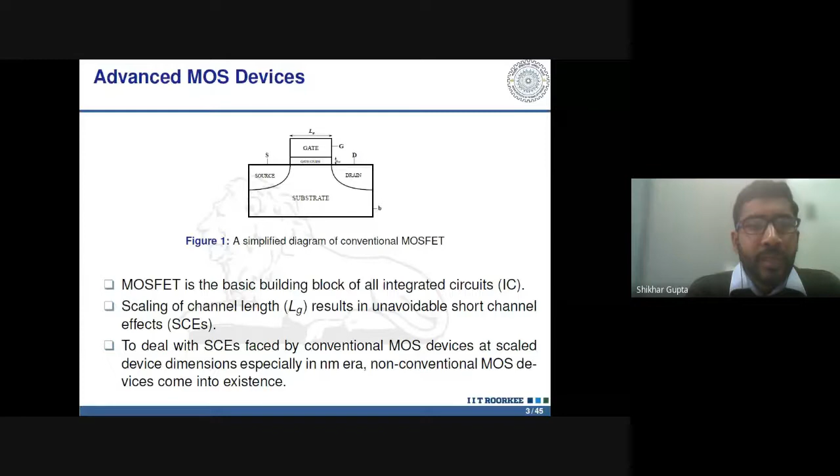To mitigate these effects, we have introduced multi-gate, multi-dimension MOS devices, which are basically under the category of the advanced MOS devices. So basically we have SOI devices, then we progress to the double gate devices, then to double gate FinFET devices, tri-gate FinFET devices, and gate all-around nanowire devices.

So there is a need to mitigate the parasitic capacitance in multi-gate devices. Since advanced MOS devices like DG MOSFET, FinFET have very good electrostatic integrity, but they also have high series parasitic resistance from the source drain region. To minimize these effects, source drain extension doping profile has been introduced with an optimized value of the underlap length.

Also, in multi-gate devices, we have seen that there are parasitic capacitances which dominate the overall capacitance of the devices. These parasitics are totally undesirable and can be neglected using various techniques. One of these techniques is introducing the source drain underlap. To overcome this problem, gate underlap is introduced for reducing the parasitic capacitance, as I discussed.

As we optimize the underlap length, we significantly reduce the fringe capacitance, resulting in enhanced device performance for low power dissipation. Optimized value of the underlap length enhances the on current, drive current, and counters the series resistance effect, short channel effect, and gate fringe induced barrier lowering effect.

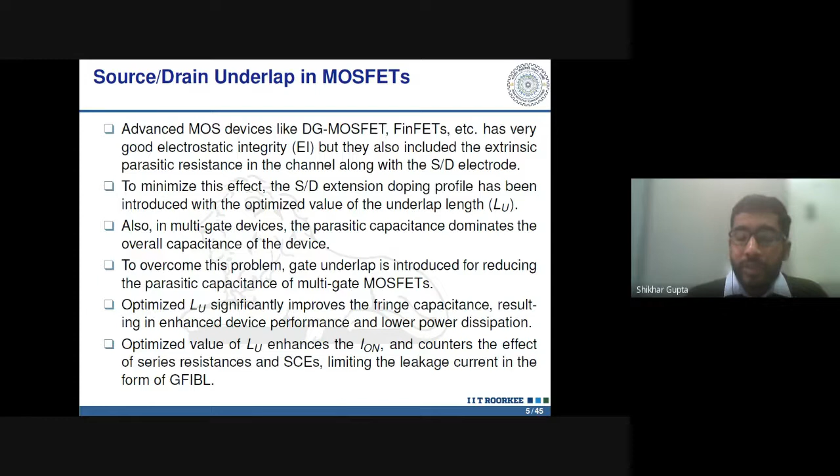These devices enhance the circuit distortion and the dynamic power of the device when compared with the conventional. Underlap devices show significant improvement on short channel effect, self-heating effect, and reduce the parasitic capacitance and series resistances, which enhance low power performance for low power circuit applications when compared to conventional MOS family devices.

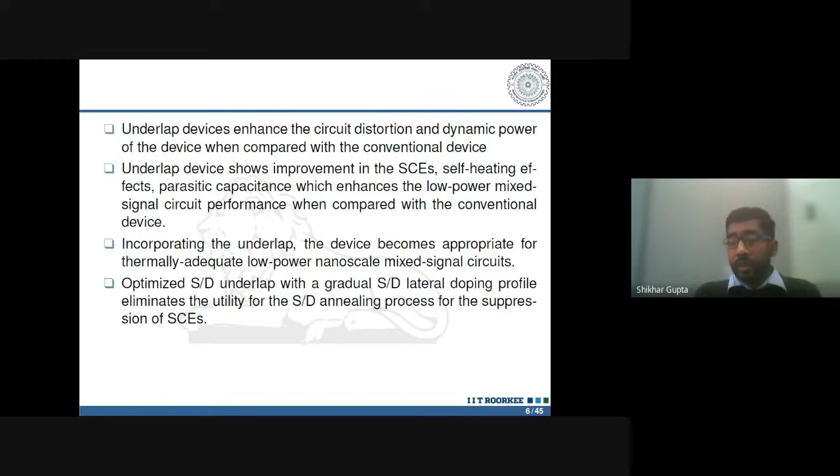The fringe capacitance in the underlap devices: parasitic capacitance, as we already discussed, is the major factor for the performance of advanced MOS family devices. One of the major parasitic capacitances is the overlap capacitance, outer fringe capacitance, and inner fringe capacitance. But as we introduce the underlap in the MOS family, the overlap capacitance is totally diminished. So the major factors dominating in this parasitic capacitance are the outer fringe capacitance and inner fringe capacitance.

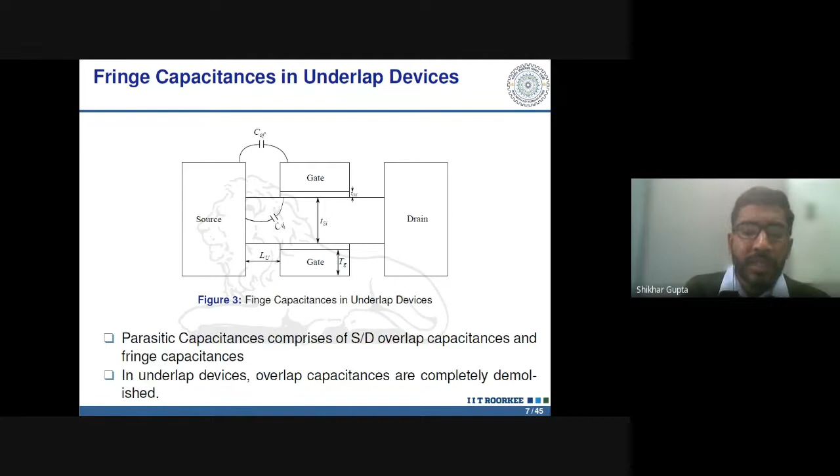These fringe capacitances are dominant and can be reduced using various spacer dielectrics, and they can also be tuned along with the optimized underlap, without mitigating the drive current capability of the device.

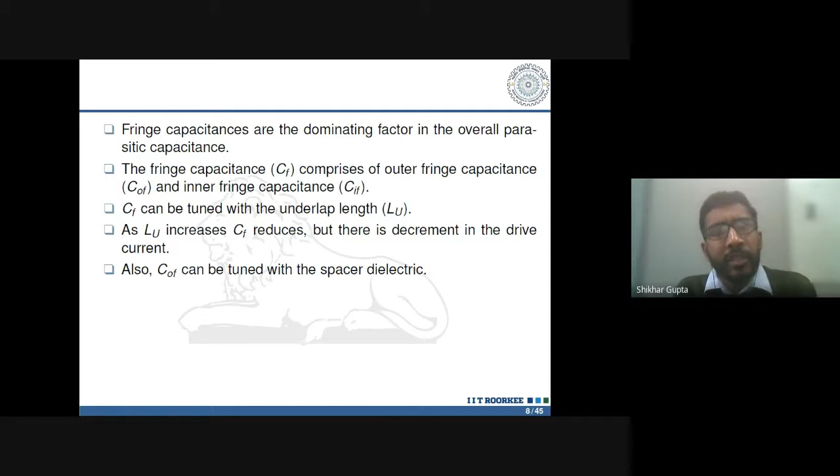The use of high-K spacer in the underlap double-gate MOSFET device enhances the figure of merit of the device in terms of gain and gain bandwidth product. It also enhances the gate fringe induced barrier lowering strength and ultimately improves the drive current, leading to enhanced device and circuit performance. The high-K spacer dielectric also enhances the barrier height, which reduces the off current, suppresses the short channel effect in terms of subthreshold slope and drain induced barrier lowering.

Some researchers introduce the dual-K spacer, which is an alternative in the spacer region for a high-K gate dielectric device, to further limit the short channel effect and reduce the output conductance of the device. It improves the analog performance of the device and is used for low power circuit applications.

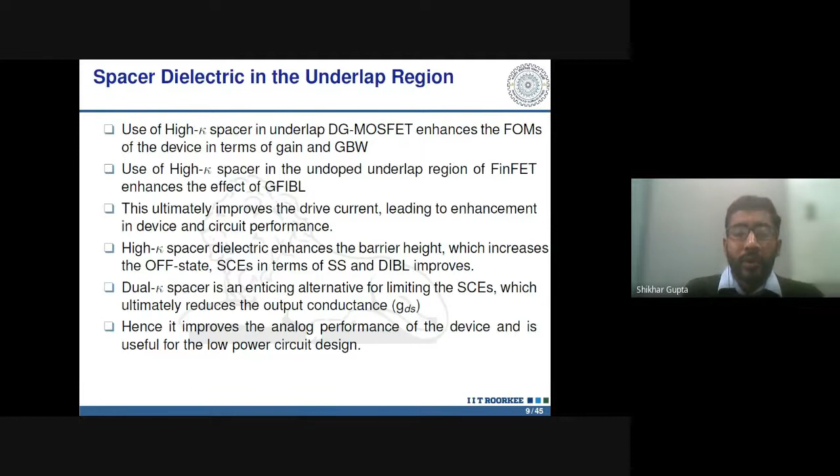Symmetric dual-K spacer means that both sides of the source and drain have equal underlap length, and the dual-K spacer has the outer-K as a low-K spacer and the inner-K gate dielectric spacer as a high-K gate spacer dielectric.

The symmetric dual-K spacer dielectric enhances the electrostatic integrity over the channel region in both on and off states, which ultimately improves the device and circuit performance. Enhanced noise margin and circuit delay can also be achieved using dual-K spacer based logic circuits, making it preferable over conventional high-K spacer materials.

In tri-gate FinFET devices, source side dual-K spacer has good gate control on the channel charge carrier, which ultimately affects the transconductance and output conductance of the device, leading to enhancement of the analog and RF figures of merit in terms of intrinsic gain, unity cutoff frequency, unity power gain frequency, and gain sensitivity.

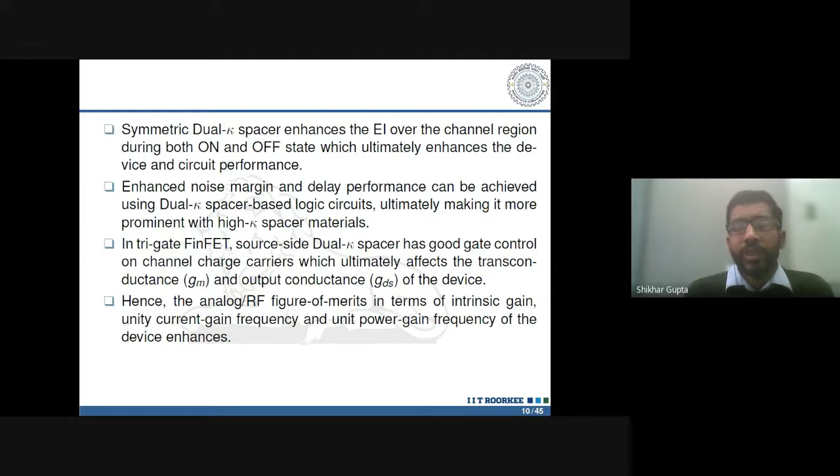For a constant current level, the dual spacer in junctionless transistors enhances the performance of the device in terms of DIBL, subthreshold slope, and on current, when compared with the conventional junctionless transistor. These methods have been reported by many researchers in various peer-reviewed journals.

So, if we reduce the dielectric constant in the underlap region, we mitigate the parasitic capacitance in terms of the outer fringe capacitance.

Conventionally, the least dielectric is silicon dioxide, which has a relative dielectric constant of 3.9. But if we use vacuum or air as a spacer dielectric in the underlap region, this reduction in parasitic capacitance also occurs.

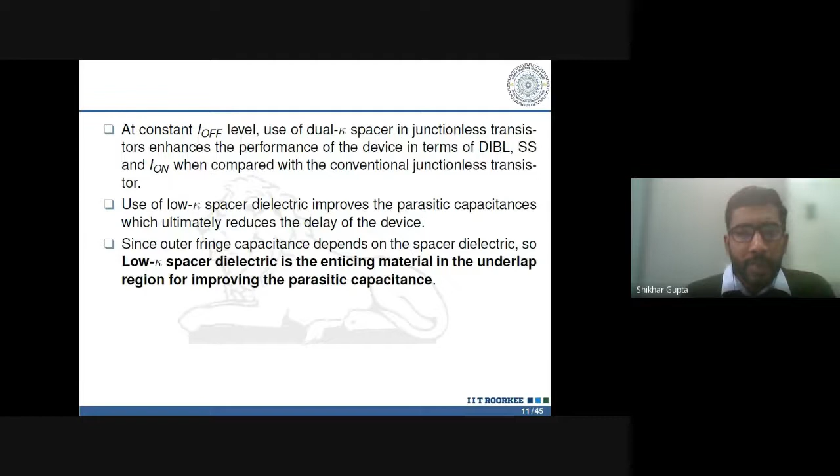This leads to the result of improving the air spacer technology. The use of the low-K spacer underlap region reduces the fringing fields of the device, resulting in improvement in the fringe capacitance. This reduces the short channel effects and power consumption, ultimately enhancing speed, switching charges, switching energy, and reducing power dissipation.

Hence, as we know, the use of low-K spacer reduces the parasitic capacitance, leading to the reduction in overall device capacitance. Hence, the delay of the device is improved.

Gate side air gap structure in MOSFET device reduces the fringe capacitance, which results in low power dissipation and high speed of operation, using air spacer instead of the conventional silicon dioxide and silicon nitride spacer. Electrostatic integrity and the performance of the device are enhanced for a fixed value of equivalent oxide thickness and I OFF.

As already discussed, air has a dielectric constant of 1. Its parasitic capacitance is minimized with the use of air spacer as the spacer dielectric.

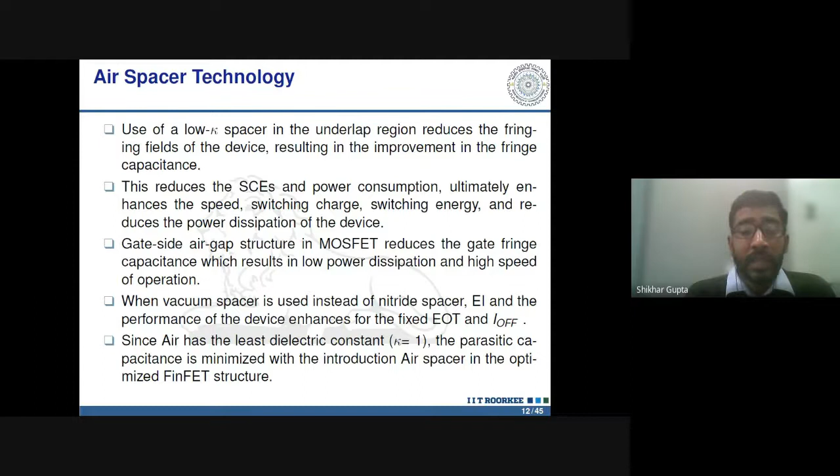These are the fabrication processes of the bulk FinFET with enhanced air gap structure.

The fabrication is as follows: firstly, the bulk FinFET silicon wafer is doped with a concentration of 10 power 17 per centimeter cube.

The fin width of about 15 nanometers was defined using resist trimming and reoxidation, and etched using reactive ion etching to a depth of 120 nanometers, followed by filling and etch-back of shallow trench isolation using high density plasma chemical vapor deposition. The final fin height above the shallow trench isolation was about 35 nanometers.

The punch-through stopper and the P-well implant were performed in two steps. The first one is BF2, implanted at an energy of 45 kilo-electron volts with a dose rate of 5 into 10 power 13 per centimeter square with a tilt angle of 7 degrees.

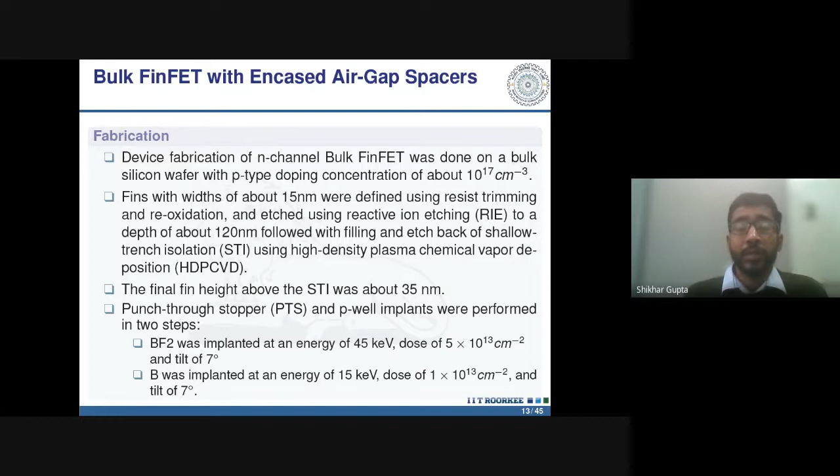Secondly, boron was implanted at an energy of 15 kilo electron volt, dose rate of 10 to the power 13 per centimeter squared, at a tilt angle of 7 degrees. The punch-through stopper implant conditions are chosen to minimize the sub-channel conduction in bulk.

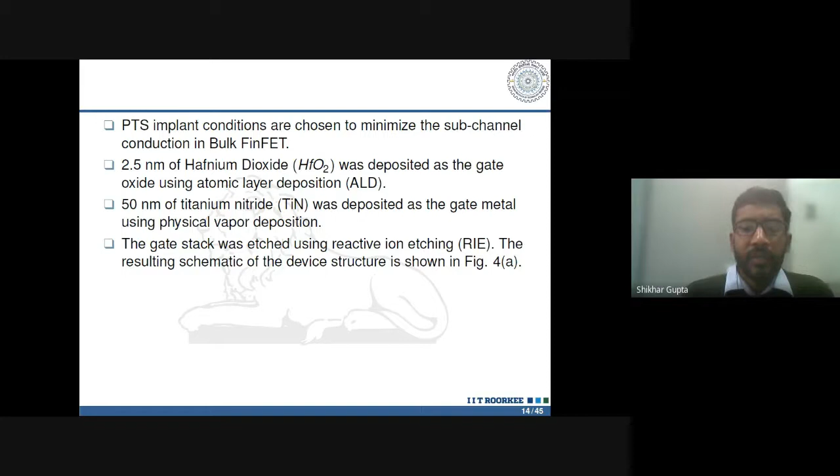2.5 nanometers of hafnium dioxide were deposited as a gate oxide using atomic layer deposition. 50 nanometers of titanium nitride was deposited as a gate metal using physical vapor deposition. The gate stack was etched using reactive ion etching, resulting in figure 4a. The whole process up to now is represented in 4a.

Now, the bulk FinFET was formed after etching of the gate stack and implantation of the lightly doped source drain region, as shown in figure 4a.

Reactive ion etching, RIE, was performed. This results in the carbon regions encased by silicon nitride.

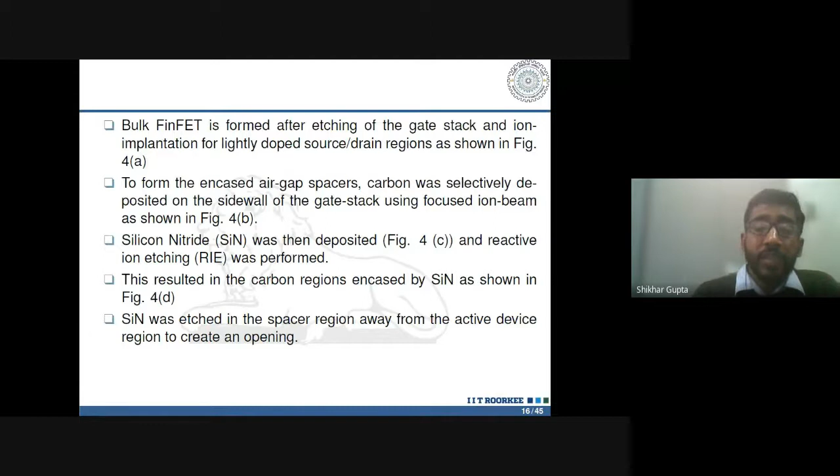The device, after the selective deposition of silicon nitride, carbon followed by silicon nitride deposition, was then exposed to mild oxygen plasma.

This process is similar to the ashing process, which is known to remove the carbon. The byproduct of this process escapes through the opening in the spacer region. The resulting spacer structure consists of an air gap encased between the silicon nitride layer and the side wall of the gate stack.

To form the highly doped source drain region, arsenic was implanted at an energy of 8 kilo-electron volt with a dose rate of 5 into 10 to the power 15 per centimeter squared and a tilt angle of 0.

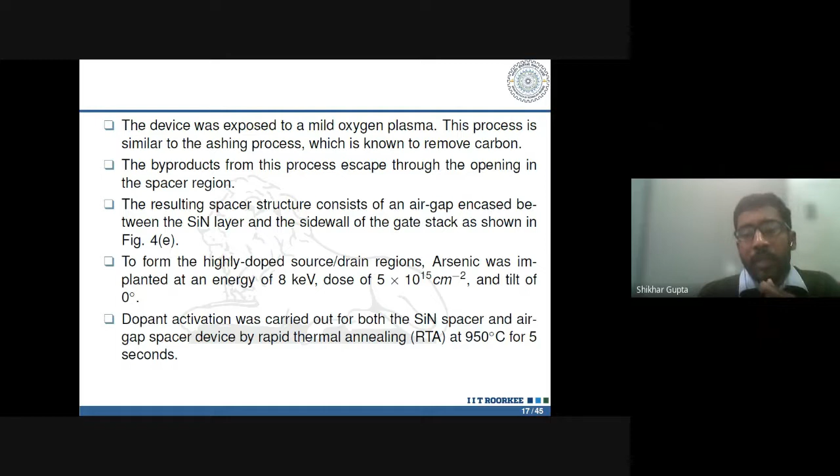The dopant activation was carried out for both the silicon nitride spacer and air gap spacer devices by rapid thermal annealing at 950 degrees Celsius for 5 seconds. So the final product we have formed is this.

This is the TEM image of the bulk FinFET. Figure 5A shows the cross-sectional transmission electron microscopy image of the bulk FinFET after high-K metal gate stack formation.

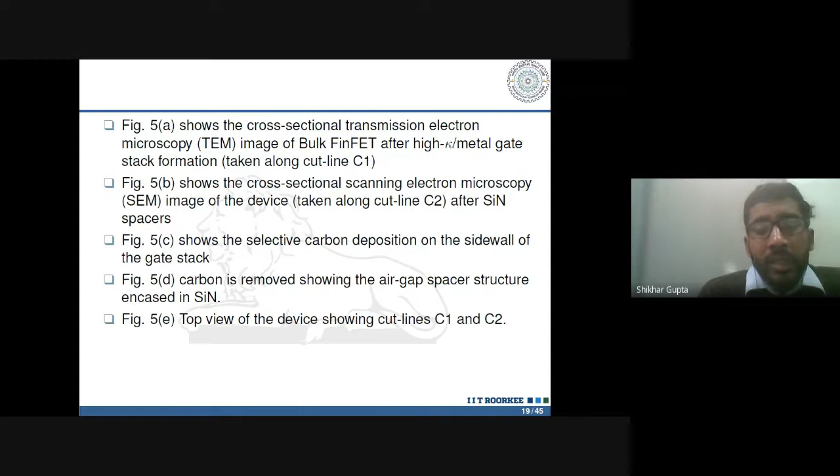So these processes are used for the fabrication of the air spacer in the FinFET family. Then, what is the effect of the air spacer on the tri-gate FinFET? One of the promising effects is to reduce the parasitic capacitance, leading to improvement in the RF and analog figure of merit of the device.

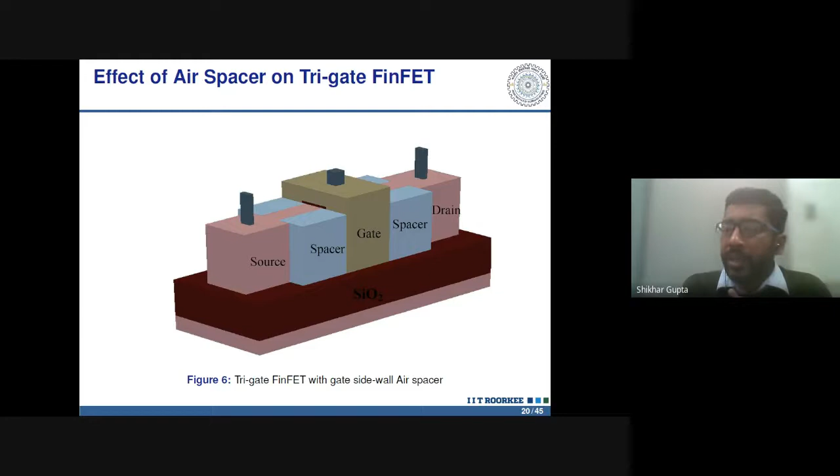These are discussed now with variation of the gate oxide thickness. As the equivalent gate oxide thickness, EOT, is varied from 3 nanometers to 0.65 nanometers, the conduction band energy, represented in figure 7, shows a slight deviation at lower EOT.

If we use air as a spacer dielectric instead of the conventional silicon nitride spacer, there is a slight deviation in the conduction band energy at lower EOT, but a significant deviation in the conduction band energy at higher EOT of 3 nanometers.

This deviation in conduction band energy can further be explained using the TGEF, transconductance generation efficiency factor. As shown in figure 8, at lower EOT there is a marginal shift in the transconductance generation efficiency factor when we change the spacer dielectric from silicon nitride spacer to air spacer.

However, there is a significant deviation in the TGEF when silicon nitride spacer is replaced by the air spacer.

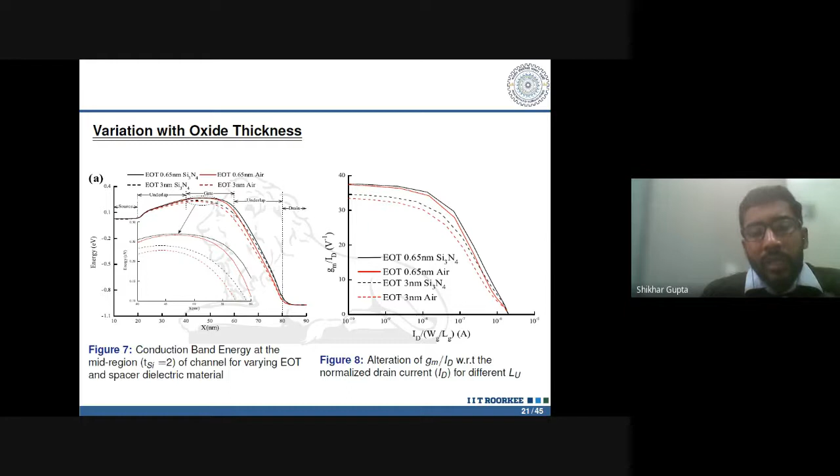Hence at lower EOT, the threshold voltage of the device won't change if we use air as a spacer dielectric instead of the silicon nitride dielectric.

Since the threshold voltage remains constant, but we are using air as a spacer dielectric, there is a reduction in capacitance. This reduction in capacitance can be seen in figure 9b, where using air as a spacer dielectric instead of the conventional silicon nitride dielectric results in a reduced capacitance.

Also, there is a change in transconductance and output conductance of the device, but the transconductance of the device dominates over the output conductance. Hence, there is a marginal reduction in the gain of the device, as we can see in figure 9c, if we use air as a spacer dielectric.

But if we look at the cutoff frequency of the device, there is a huge improvement in the unity gain frequency, or cutoff frequency. If we use air as a spacer dielectric for all variations of the equivalent oxide thickness, the cutoff frequency of the device enhances.

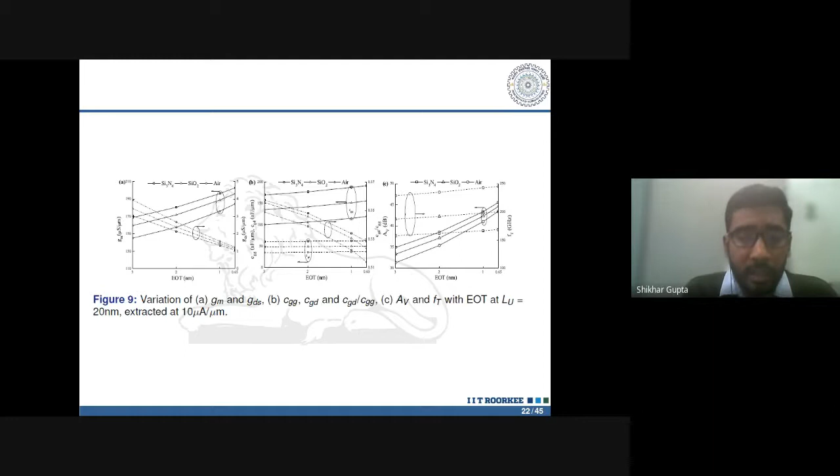This leads to further enhancement of other figures of merit, the RF figure of merit, in terms of unity power gain frequency, transconductance frequency product, gain frequency product, and gain transconductance frequency product. Use of air as a spacer dielectric enhances these figures of merit, and they also improve if we scale down the equivalent oxide thickness.

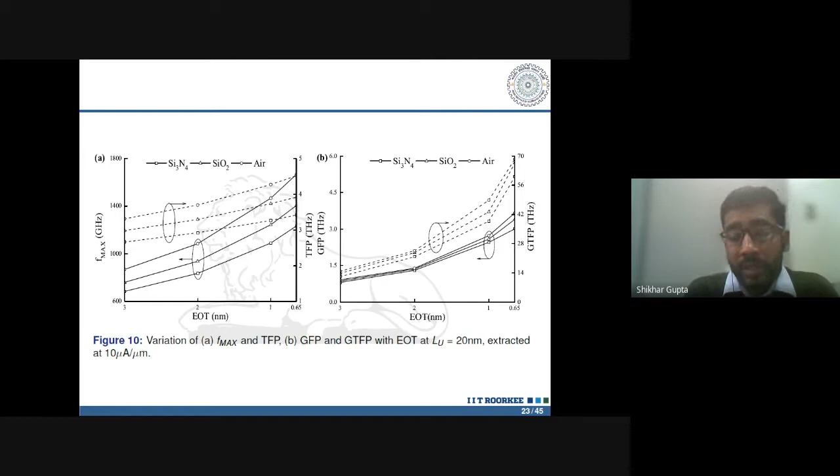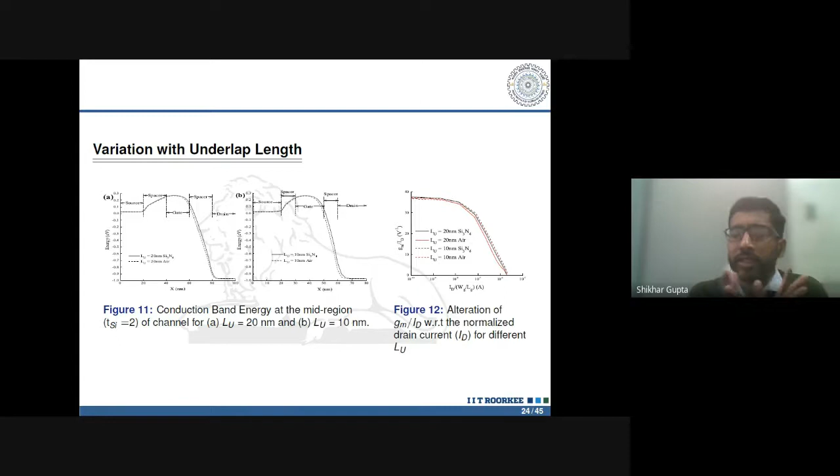Okay, so the variation with the underlap length - this is the optimization of the underlap length. We take two underlap length structures varied from 10 nanometer to 20 nanometer device, and observe that at 20 nanometer and at 10 nanometer with a fixed EOT of 0.65 nanometer, there is no significant improvement in the conduction band energy and transconductance generation efficiency factor.

But since we are using air as a spacer dielectric and optimizing the underlap length, there is an improvement in the capacitance of the device. If we reduce the underlap length, the capacitance increases, as we can see in figure 13b. The intrinsic capacitance and drain-to-gate capacitance of the device increase if we reduce the underlap length from 20 nanometer to 10 nanometer. This increase in capacitance leads to a reduction in the cutoff frequency of the device when we optimize the length from 20 nanometer to 10 nanometer.

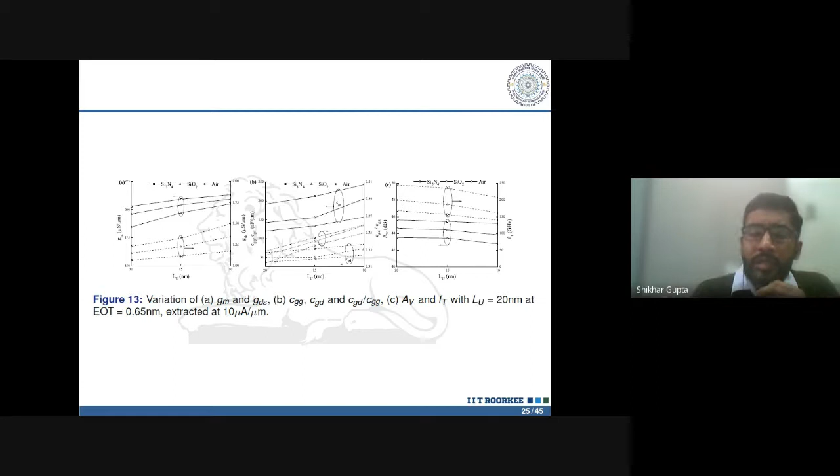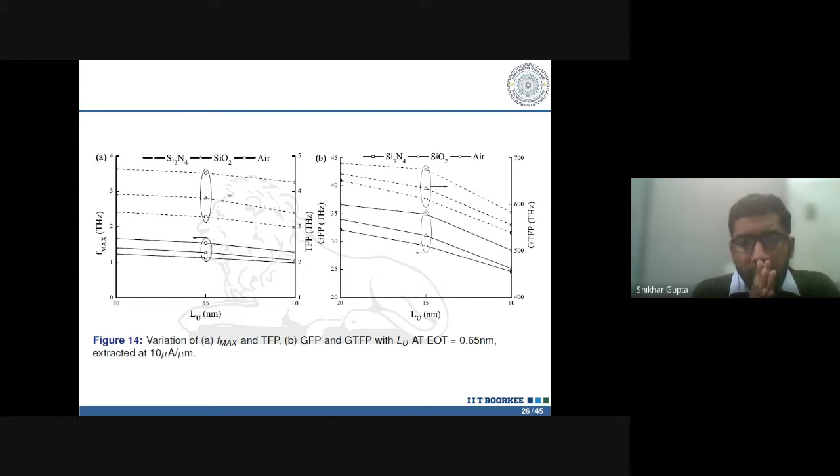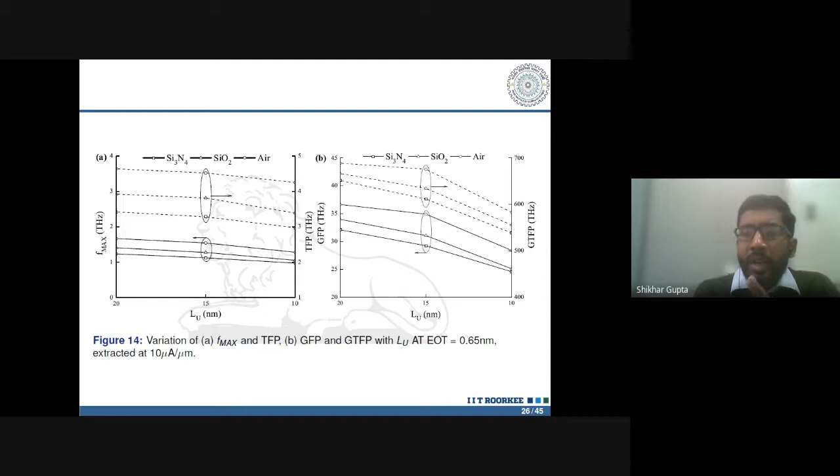This is also observed in other figures of merit of the device like Fmax, TFP, GFP, and GTFP for a fixed EOT. So it is observed that if we optimize the underlap length to 20 nanometer and fix the EOT at 0.65 nanometer, then we can use air as a spacer dielectric for low power, high frequency application, and it can also be used for low power circuit applications.

Now, what is the effect of air spacer in the tunnel FET? As we know, a tunnel FET is a PIN junction diode, and if we introduce the underlap in the tunnel FET, there is a reduction in capacitance, as already discussed. If we use a dual-K spacer in this underlap region, there is an effect of both high-K and low-K spacer dielectric. So we have used a dual-K spacer in the underlap region, using inner K as a high-K spacer material of HfO2 and outer K as a low-K spacer material, and analyzed the effect of this.

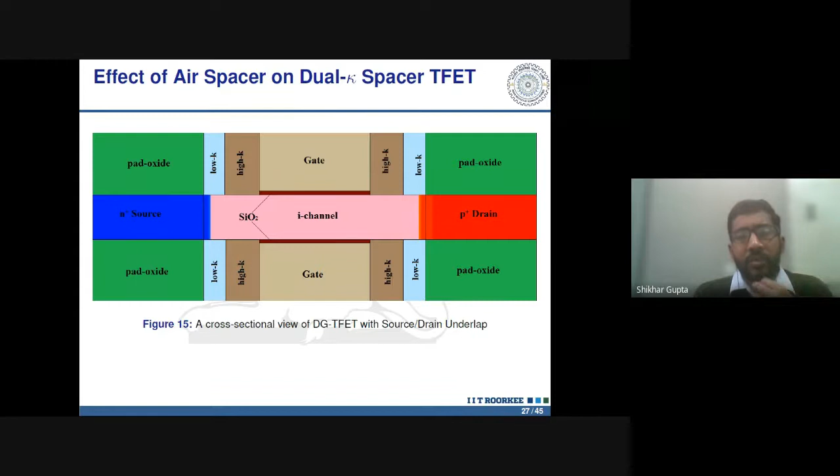If we use a dual K spacer instead of a high K spacer like HfO2, the tunneling length is further reduced. And if we use air as an outer low K spacer dielectric in the underlap region of the dual K tunnel FET, this tunneling length is further reduced.

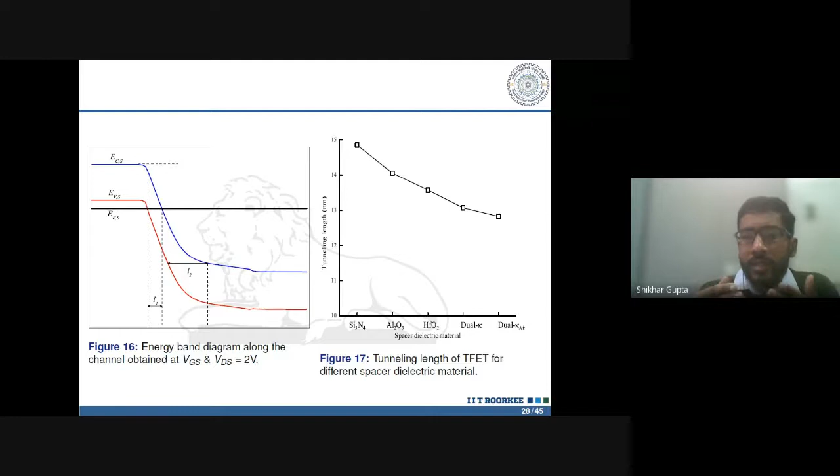That use of dual K spacer increases the drive current of the device instead of using the high K spacer. And if we use air as the outer low K spacer dielectric in the underlap region, this enhancement in the drive current is also improved.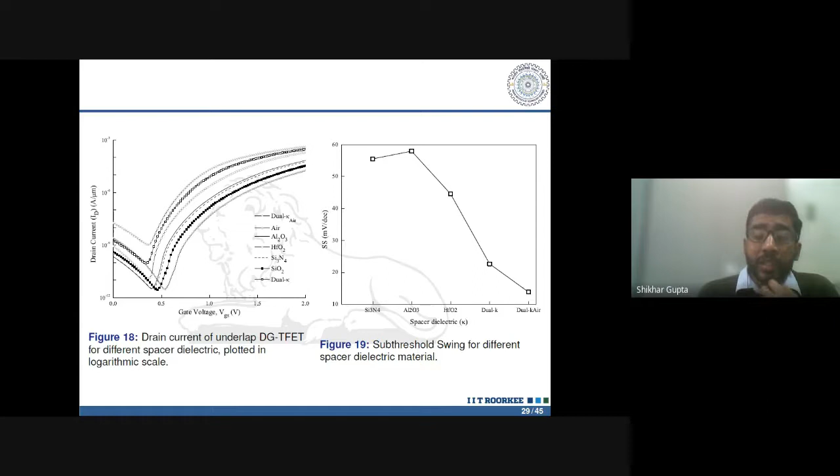Further, the subthreshold slope of the dual K spacer device is reduced, which is very good in TFET, and this reduction is also observed when air is used as the outer K spacer dielectric in the tunnel device.

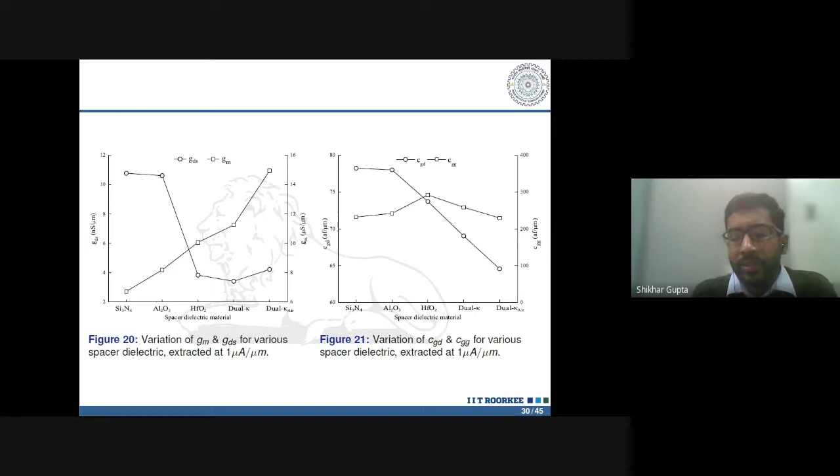Finally, other figures of merit like transconductance, output conductance, and device capacitances also improve when we use dual K spacer dielectric in the underlap region of the tunnel FET, leading to enhancement in the intrinsic gain and cutoff frequency of the device. This is further improved when we use air as the outer spacer dielectric in the tunneling region.

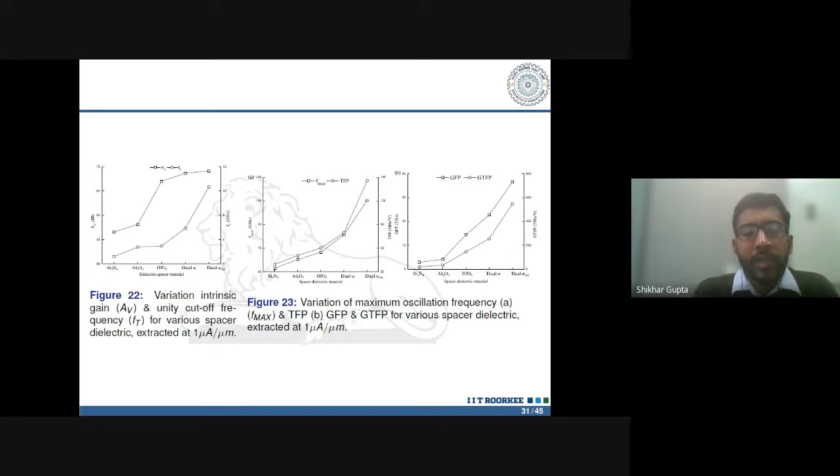Other figures of merit like unity power gain frequency, transconductance frequency product, gain frequency product, and gain transconductance frequency product show results that are pretty good — the use of air as an outer low K spacer dielectric in the dual K spacer underlap FET enhances these performances.

The next device we are going to discuss is the silicon nanowire, which can simply be called a gate-all-around MOSFET, or gate-all-around silicon nanowire. There are many silicon nanowires, silicon nanoFETs — many names given by many researchers.

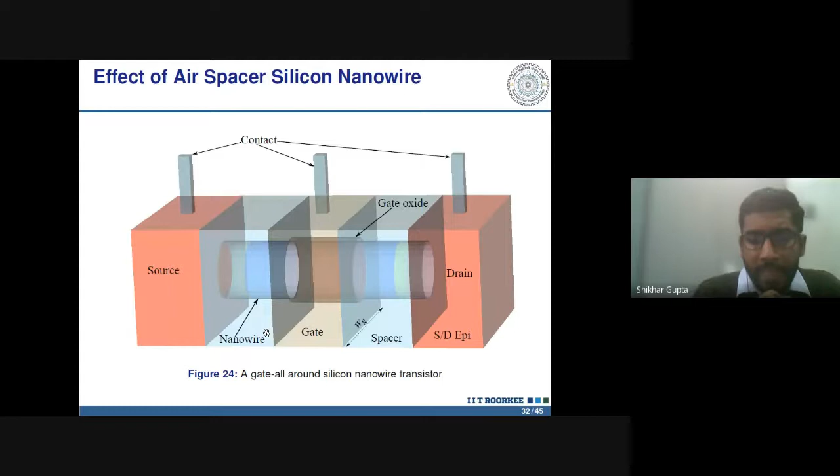So this is a silicon nanowire structure, and this is the underlap region. Here we are also observing the effect of air spacer in the underlap region of the silicon nanowire, or cylindrical, gate-all-around silicon nanowire FET.

It is observed that the device is simulated at a diameter of nanowire of 10 nanometers, and we have varied the equivalent oxide thickness from 0.6 nanometer to 1.2 nanometer, and also varied the underlap length from 8 nanometer to 12 nanometer. The gate length of the device is around 12 nanometer.

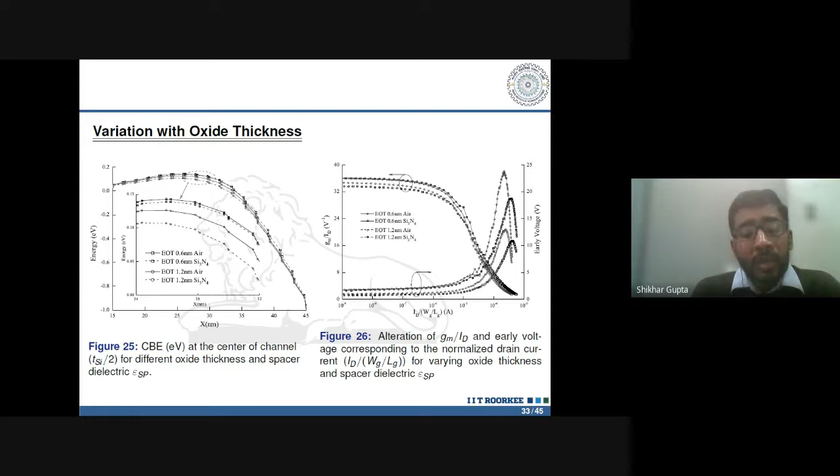This result replicates the transconductance generation efficiency, and it is observed that there is a slight deviation between the air spacer and nitride spacer at lower EOT, and a significant deviation between them at higher EOT. This leads to there being no change in the threshold voltage of the device at lower EOT.

...there is a reduction in the transconductance, and there is also a reduction in the output conductance, but this reduction in output conductance dominates over the reduction in transconductance. So there is an improvement in the intrinsic gain when we scale down the EOT from 1.2 to 0.6.

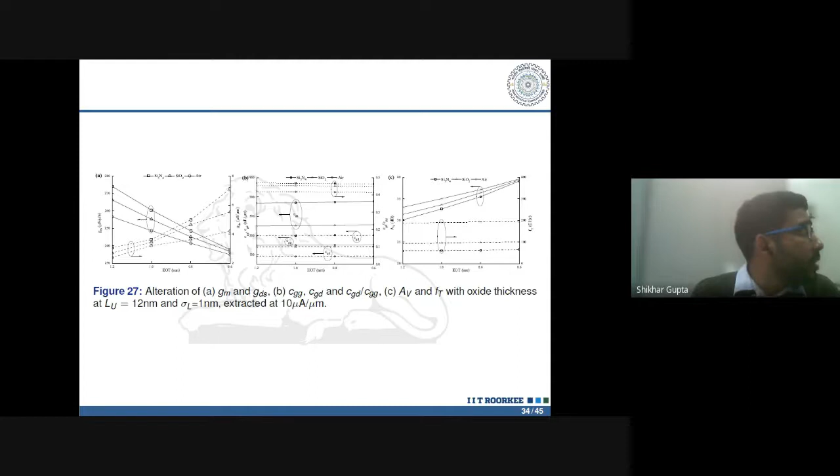Also, as we know we are using the air spacer instead of the conventional silicon dioxide and silicon nitride spacer, there is a reduction in the capacitance of the device, leading to the enhancement in the cutoff frequency of the device.

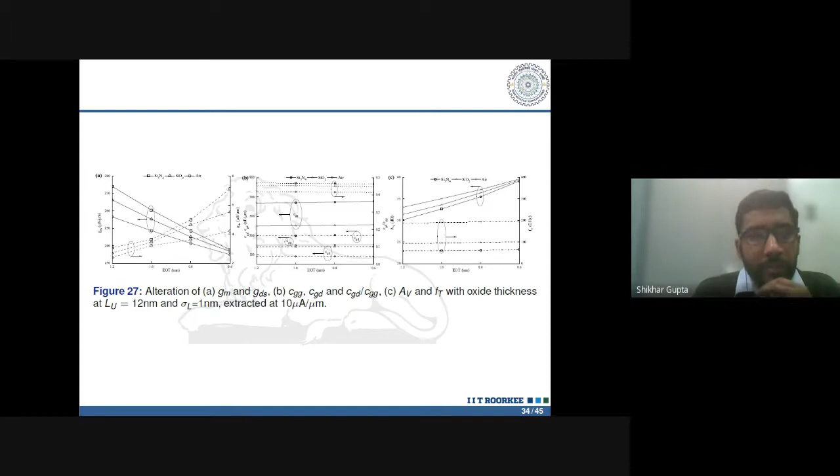This improvement also replicates in the other figure of merit of the device, like Fmax, TFP, GFP, and GTFP. The result we have extracted for all the devices is at 10 microampere per micrometer. We are taking this point as a weak inversion or moderate inversion point for the extraction.

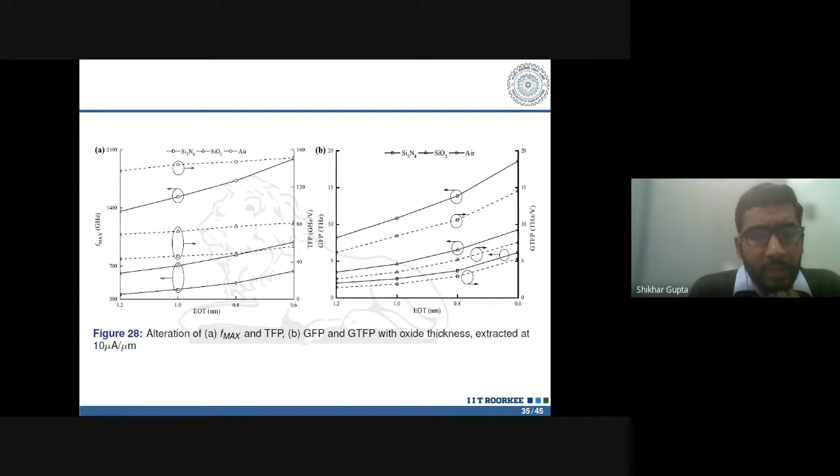Variation with the underlap, as we varied the underlap length from 12 nanometer to 8 nanometer, there is not such a significant difference, but at 12 nanometer underlap length, the deviation in the conduction band energy between the air spacer and the nitride spacer is quite small rather than the deviation in conduction band energy between the air spacer and nitride spacer at 8 nanometer underlap length. Hence,

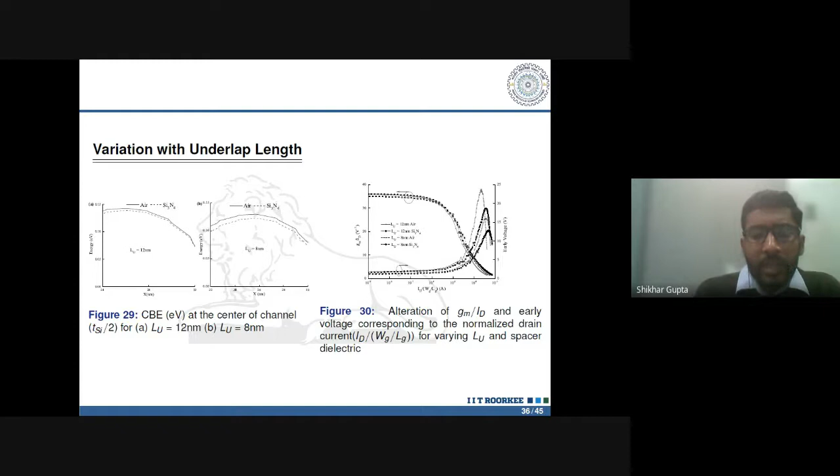if we scale the length, the output conductance of the device increases, which is not beneficial for the device, and this leads to the reduction in the intrinsic gain of the device. Also, the capacitance of the device increases, which leads to the reduction in the cutoff frequency of the device if we scale, or we can say if we optimize the underlap length from 12 nanometer to 8 nanometer.

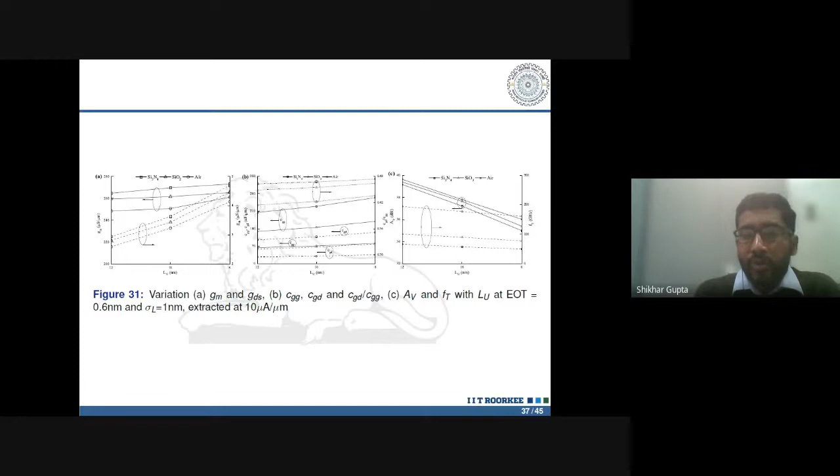So it is concluded that if we use 12 nanometer underlap length with an equivalent oxide thickness of 0.6 nanometer and a straggle length of 1 nanometer, the gate-all-around silicon nanowire MOSFET can be best used as an air spacer MOSFET for high performance and low power application.

If we vary the operating temperature, suppose we have to use a MOSFET device at a cryogenic level, at a liquid temperature level, or in space application, we have to check at which temperature range the device will work in a good manner. So if we lower down the temperature, there is a significant reduction in the conduction band energy, and this is

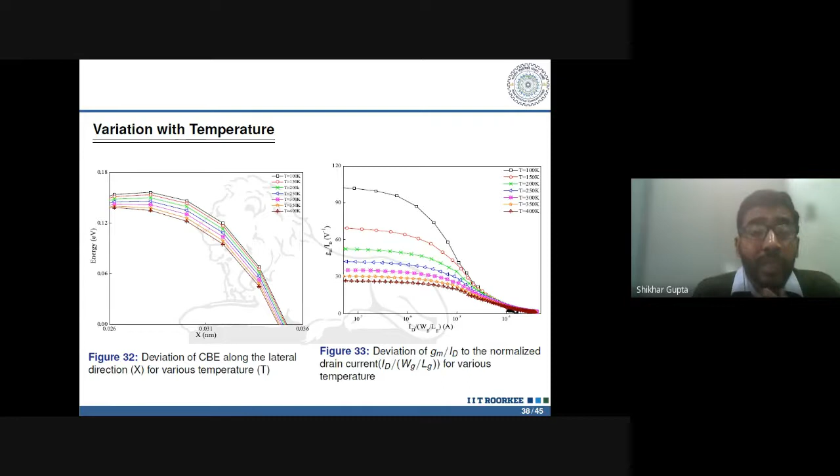also replicated in the transconductance generation efficiency, that at low temperature the transconductance generation, there is huge improvement in the transconductance generation efficiency, leading to the improvement in the transconductance and the output conductance. But the increase in the transconductance dominates over the increase in the output conductance.

Hence, the gain of the device increases when we reduce the operating temperature from 400 Kelvin to 100 Kelvin. Also, it is observed that there is not such a deviation in the capacitance of the device when we vary the operating temperature from 400 Kelvin to 100 Kelvin.

But since there is an improvement in the transconductance of the device, there is an improvement in the cutoff frequency of the device, since the cutoff frequency is the ratio of the transconductance and the intrinsic capacitance of the device. The cutoff frequency, or unity current gain frequency, increases when we lower the temperature from 400 Kelvin to 100 Kelvin.

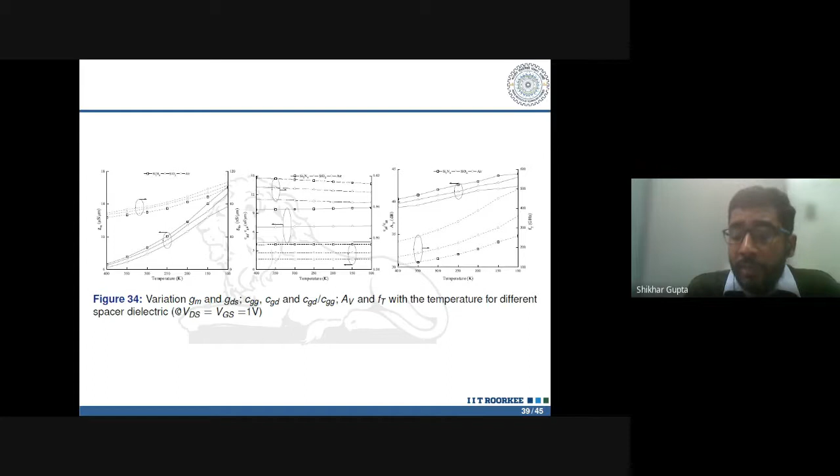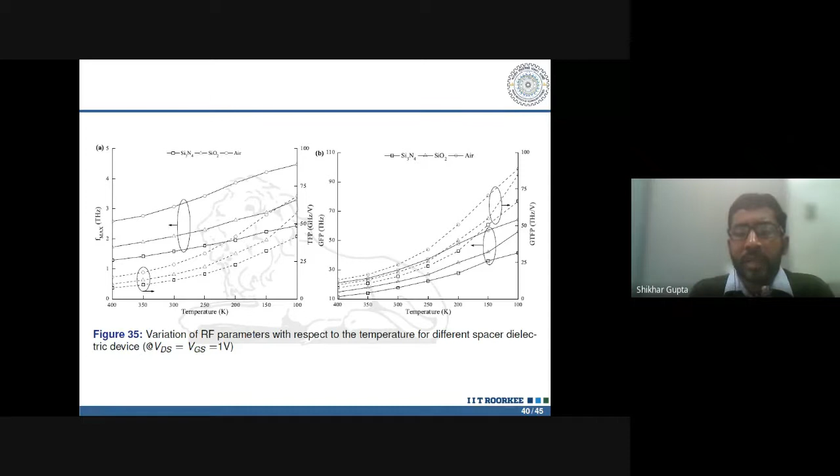Since there is an improvement in the gain, the transconductance, and the cutoff frequency, hence there is an improvement in the other RF figures of merit, like maximum oscillation frequency, transconductance frequency product, gain transconductance frequency product, and gain frequency product.

Up to now, is there any question? Please let me know.

Because we are going to discuss the circuit application part of the air spacer based MOS devices, so if there is any query up to now, please let me know.

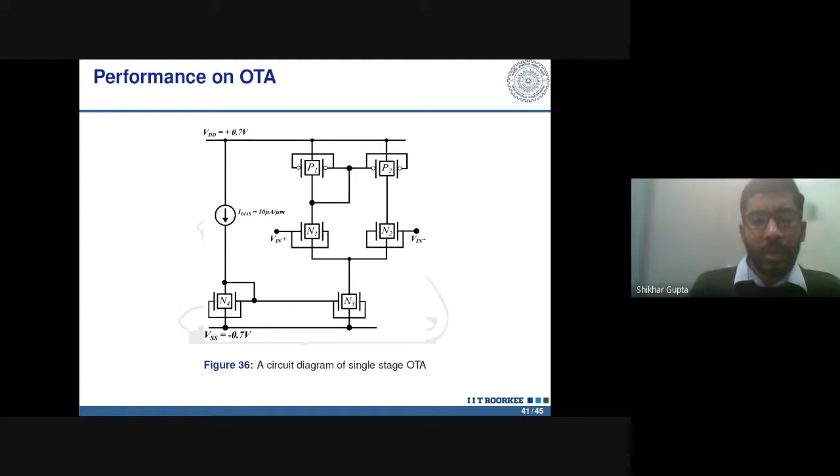Operational transconductance amplifier is a type of op-amp. You can say that it is a type of op-amp where a current mirror is connected to it. So these are the circuitry of the op-amp.

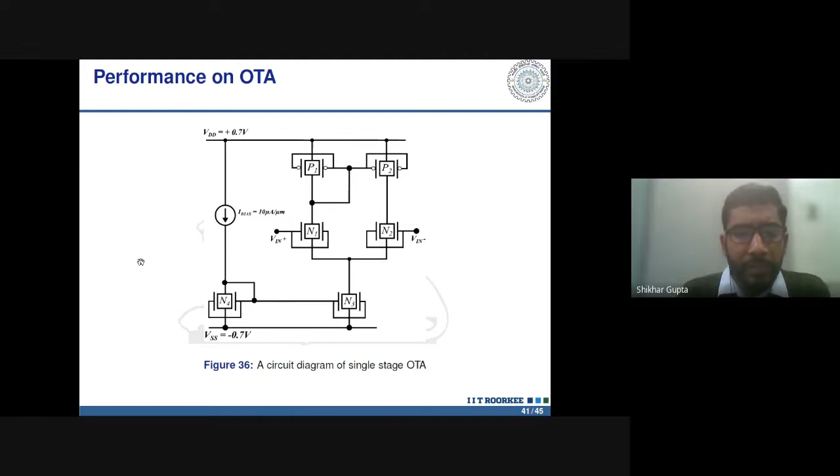So it is observed from the various analysis over the TCAD, and there are various methods we can use these devices which we modeled in the TCAD. One of the uses is the mixed mode simulation in the TCAD itself.

Another use is the BSIM CMG model, which is available online, and we can tune the parameters according to our device, and use that BSIM CMG model in any circuit simulator like Cadence Virtuoso.

Thirdly, there is a Verilog-A model method in which we use the various ID-VG and CV curves for analyzing various gate and drain voltages, and use that Verilog code in the circuit to observe the performance of the device in circuit and application.

So based on that, we have analyzed that if we use air as a spacer dielectric in the underlap region instead of conventional silicon nitride spacer dielectric, the gain of the device increases, as we can see in figure 37 on the left hand side.

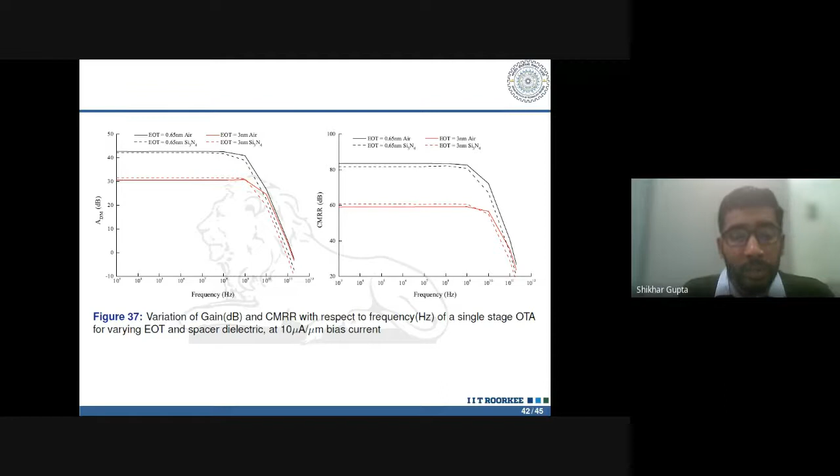However, for underlap length of 10 nanometer, cutoff frequency is observed at 140 GHz for air spacer and 74 GHz for nitride spacer. So it is observed there is a huge improvement in the cutoff frequency, or unity gain frequency, of the circuit if we use air as a spacer dielectric.

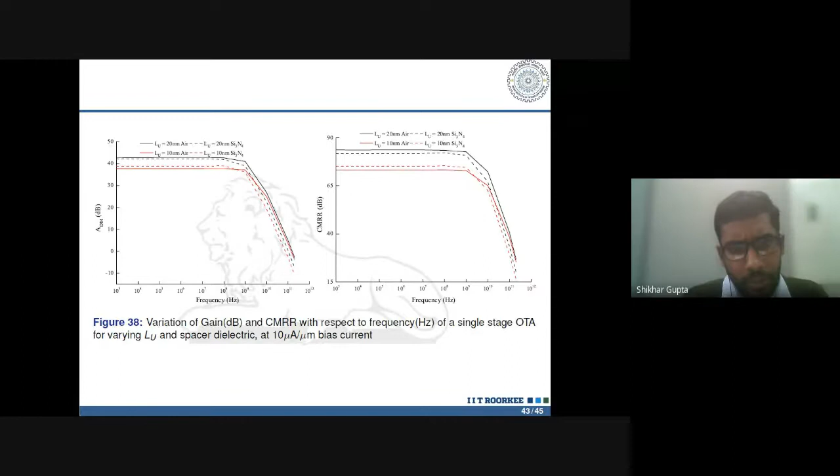So figure 38 replicates the... let me show again. Yes, exactly this one. If you look at the right side one or the left side one, after the gain region, around 10 to the power of 10 and 10 to the power of 9, I see two slopes in the roll-off region. So just wondering, could you please comment on why I'm getting two slopes in the roll-off region? Sir, in the op-amp, if there is a cutoff frequency, after that the gain is reduced. So this roll-off region is because of that.

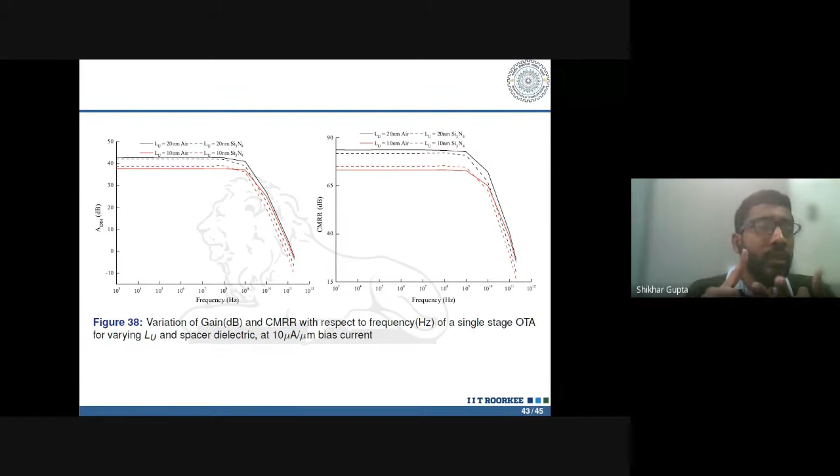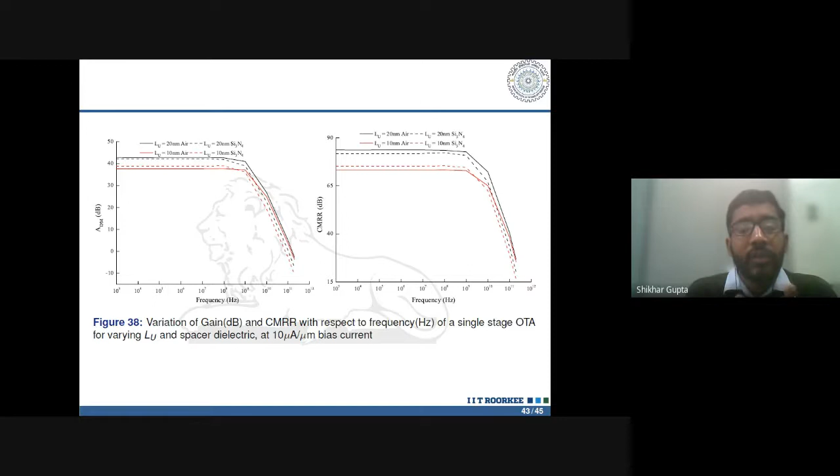I understand that, but usually you have one cutoff frequency, so you should get one slope. But sir, we have four devices here. We have devices for two underlap lengths, and for both the underlap lengths we have used the air spacer device and silicon nitride spacer device. So conventionally we have two devices, but here we have four devices, so we have four roll-offs. Thank you, Dr. Gupta, for your detailed explanation. Thanks a lot. Okay, sir.